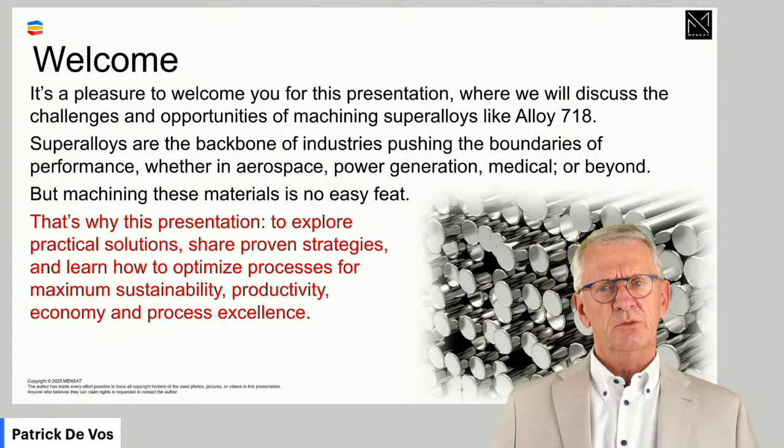That's why we have this presentation, to dive into what exactly is machining of superalloys, where the real challenges are, and more important, how we can cope with them, how we can handle it. My name is Patrick de Vos, I'm your host of today.

I have a model, one could say, of a machining process which I want to share, because this is the framework on which I base a lot of statements I make. I try to define machining as a physical process. Machining is a process where a tool removes material through a process of deformation and shearing off. In such a process, lots of phenomena take place: mechanical, thermal, chemical, whatever. It's a rather complex system.

Machinability is about the ability to bring balance in this system, where I have a cutting tool confronted with a workpiece material, and I want balance. I want the loads acting on the tool and the load bearing capacity of the tool to be in balance. Then I have a balanced machining process, and the variables in this equation are numerous. There are quite a lot of variables we have to take into account if we want to understand this physical process. Creating a good machining process is solving the equation, one could say.

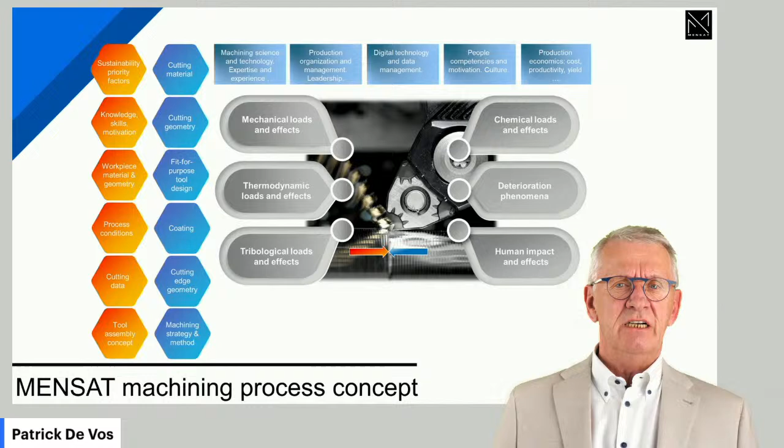To solve this equation, quite a lot of knowledge domains and skill domains are needed. One could say the profession of a machinist is rather difficult. One has to have insights in physical phenomena, understand organizational stuff, and so on and so forth.

Solving the equation also means we have to be able to measure. We need metrics, and the very typical metrics we have in machining are tool wear. Later on when I talk about machining of superalloys, you'll hear me talk quite a lot about wear processes and deterioration. The quality of the finished workpieces is another metric. Don't underestimate still today the opinion of the operator, especially when it's a skilled operator. He can read the process, and listening to what he saw or observed is a very important metric.

In the end, one could say machining is a technological thing, but it's also a commercial thing, because with machining we want to produce workpieces for customers, and in the end it's the customer who decides if we did a good job. A good job in machining can be multiple things: it can relate to costs, productivity, promises made on delivery time, sustainability stuff, and so on and so forth.

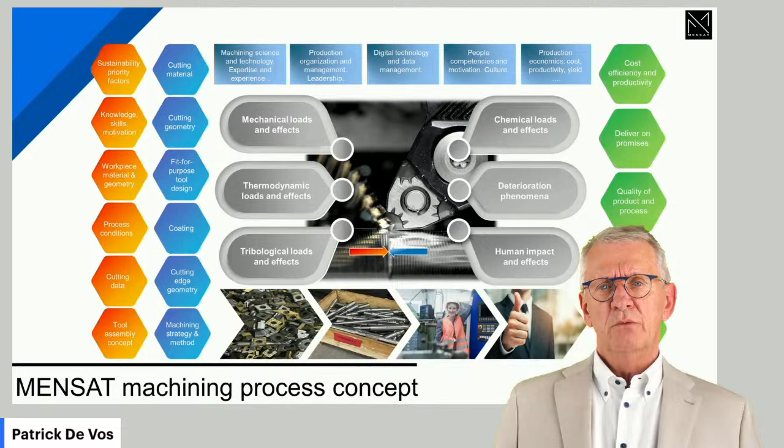So this is the model I use, and in the background this is the model I want to use when we talk about machinability elements of superalloys also. If you want to learn more about this model, there's quite a lot of literature available, and if you're interested, just give us a message and we will inform you more about it.

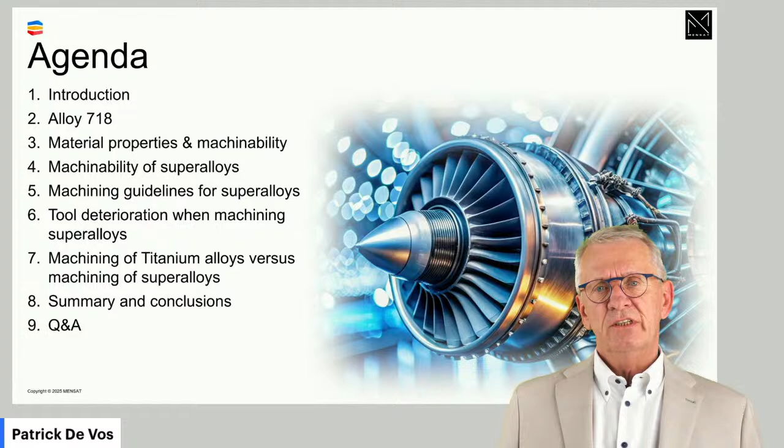There are differences, and I want to draw your attention to those differences, just to make clear that because these are two rather expensive materials, a titanium alloy and a superalloy, if we make false suppositions, if we think, we suppose, it could lead to losing workpieces.

And as I already said, it's a bit of a dangerous exercise. Now, superalloys, the name superalloy, perhaps interesting to know: the word superalloy was used for the first time in a report made in a metallurgy lab at Boeing in 1954.

One of the people there was referring to what was a nickel-based alloy, saying this is a superalloy, as it seems it behaves completely different from other materials we work with. A superalloy keeps its strength at very high temperatures, instead of losing it like we normally see in metals. And that is the origin of the word superalloy.

Superalloys keep their strength at very high temperatures due to the so-called gamma prime precipitation strengthening. I'm going to come back to it because it's a phenomenon we machining people have to be aware of.

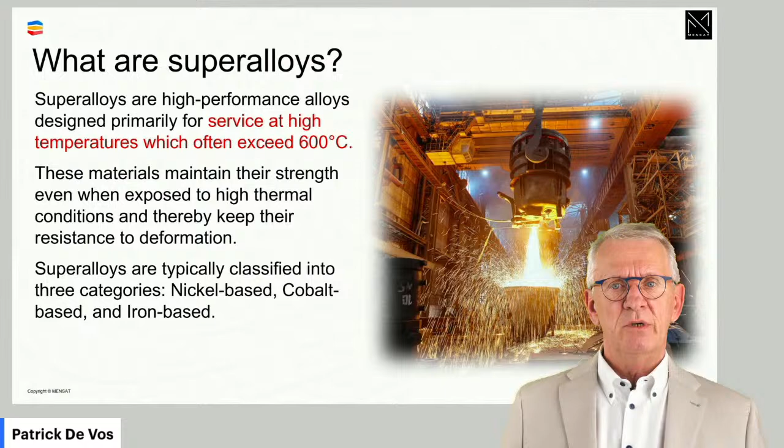We find mainly these materials, as I already said, originating from aerospace. There we very typically find nickel-based materials, Inconel 718 is kind of the type material for aerospace applications.

We also find power generation, where it's more the cobalt-based superalloys we will meet. And there are also applications in the medical segment, where it's the more complex alloys. Cobalt, chromium, molybdenum are typical examples of materials we use there.

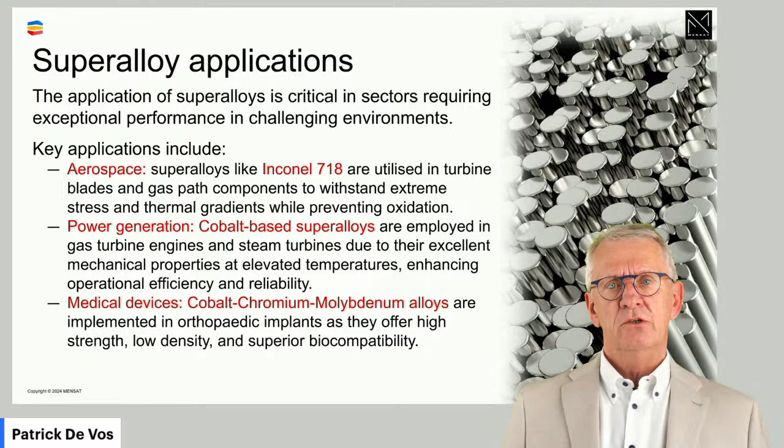Superalloys, as I already said, have quite a lot of members, but we can split them into three groups or subfamilies. You have the nickel-based superalloys, mainly found in aerospace applications. Cobalt-based superalloys, where the main material is cobalt. And then we also have the iron-based superalloys.

The iron-based are kind of the oldest superalloys. I would say iron-based is mainly there where we look for less expensive materials. It's perhaps dangerous what I'm saying now, but from a performance perspective, iron-based are the least ones, but on the other hand, they are also the cheapest ones.

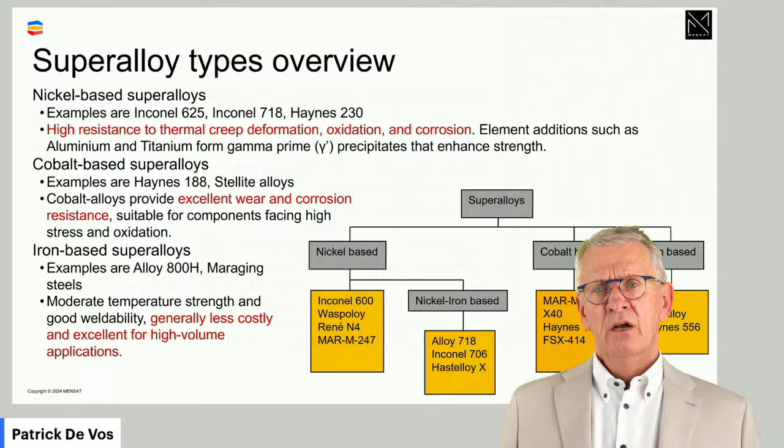But these are the three big families. What we have in superalloys is that quite a lot of the materials we are confronted with are commercially indicated or have commercially indicated names. That means that contrary to steel applications or cast iron, where there are standards and norms, it's a bit of a thing we still miss in superalloys.

But I'm going to come back to it because people working with standards and norms are working on that. Now, the key properties we use superalloys for is the high strength of the materials, and especially high strength, which is kept at high temperatures also.

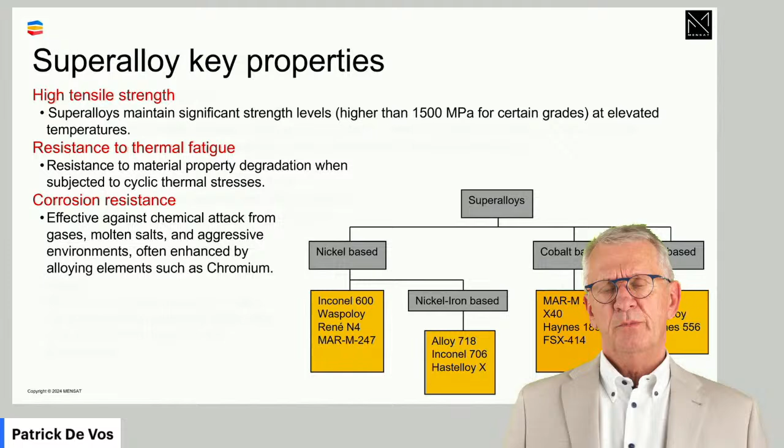Resistance to thermal fatigue: if the materials are exposed to quickly changing temperatures, the materials can handle that. A traditional steel, when you expose it to quickly changing temperatures, will develop temperature cracks in the structure. Superalloys are more resistant to that, and there's also corrosion resistance. Especially certain types of superalloys show rather high corrosion resistance.

Now, superalloys, and I take here the example of a jet engine, you find very often in a construction together with, I call it here, sister materials.

If you look in a jet engine, you find titanium alloys, superalloys, some parts perhaps in steel, some parts in aluminium, some parts in stainless steel. You find all these materials kind of always in the same assembly. And that's why machining people always think it's a group of materials.

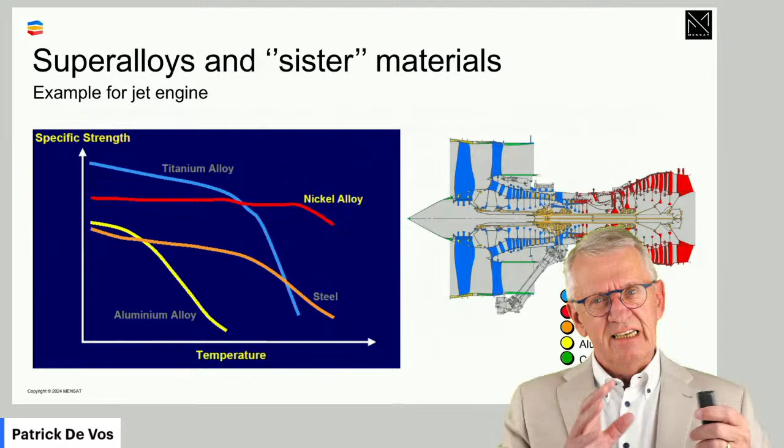Now we have to be careful with that, because if I take titanium alloys and superalloys, and I take two very typical representatives of those materials - titanium 6Al4V, which is commercially perhaps the most used titanium alloy, and I compare it with the superalloy Inconel 718, or alloy 718 - what we see is that from a strength perspective, at lower temperatures, titanium is stronger than a superalloy like Inconel 718.

However, when temperatures go above 400-500 degrees Celsius, titanium starts to lose its strength, while alloy 718 keeps the strength up to close to 1000 degrees Celsius, where titanium by then already lost nearly all of its strength. That's a big difference.

The other big difference between the two materials is the density. Titanium has a low density, whereas superalloy has a high density, even perhaps higher than traditional steel.

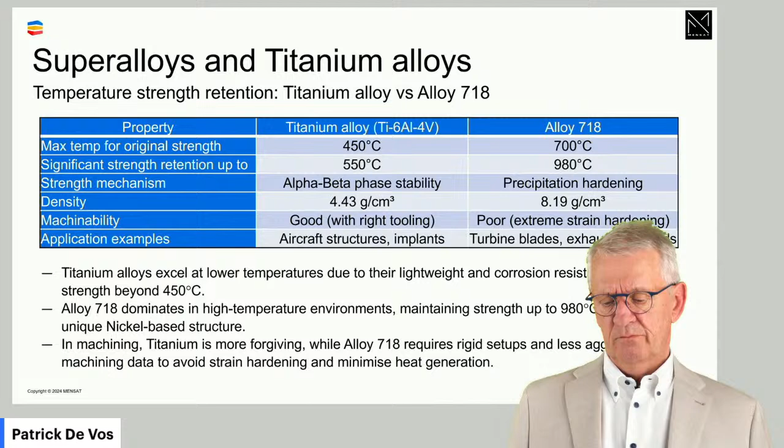The machinability, here as a general picture, but later on we go much more in detail. I would say if you compare the two, machinability of a superalloy is lower than the machinability of titanium. But I'll specify that more in detail later on.

Now, alloy 718 - I already used the word a couple of times. One of the original superalloys, and still today quite a lot used, is the so-called Inconel 718. Inconel 718 is a commercial name of a material which basically contains around 53% nickel, with a lot of properties related to that.

Now, a group of people sat together and they said, we always compare superalloys with steel materials and try to define machinability of superalloys compared to machinability of steel alloys. But that is a bit of a handicapped comparison, because we try to compare two different types of materials, and that doesn't always work well.

So we kind of need a standard when we talk about superalloys. We need a reference material, and that material became what is referred to today as alloy 718. If a material is allowed to be labeled alloy 718, and the origin of it is Inconel 718,

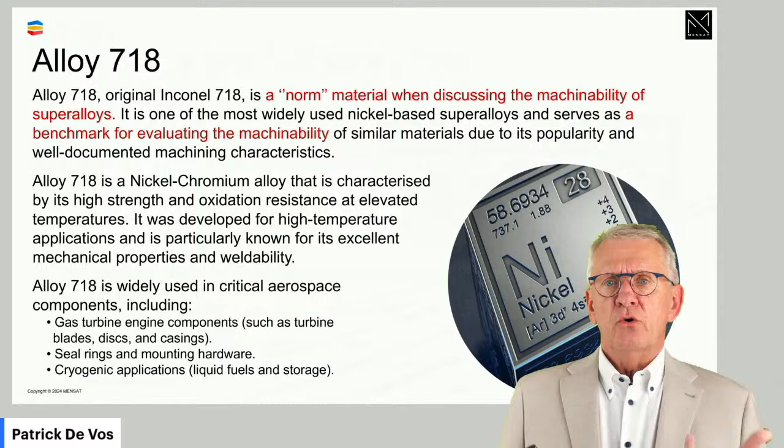it has a number of standardized norms, properties, features about composition, about properties, and also, from our perspective as machining people, machinability elements. Alloy 718 shortly is the reference material we use more and more when we talk about machinability of superalloys.

Now, just so you have an idea, what is alloy 718? It's a rather hard material, and depending on how it is produced and thermal treatments and so on, it's between 30 and 45 Hardness Rockwell C. It's a rather tough material at the same time. That's one of those things that makes superalloys super - they can be hard and tough at the same time.

There is serious strain hardening in this material when you deform it, which is a wanted property from a constructive perspective, where we use superalloys as construction materials. For us machining people, however, this is something to worry about.

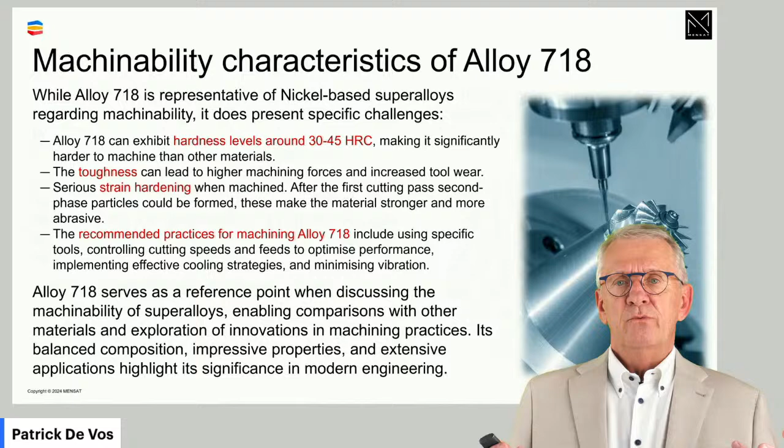Very often, if we talk about superalloys, we will take the machining practices for Inconel 718, or alloy 718, as a reference, and compare - we call that, a bit the wrong word, but anyway - the standard approach. Compared to that, we classify other superalloys in terms of how to select cutting tools, how to select cutting conditions, and so on. In short, alloy 718 is a bit of a reference material when we discuss machinability of that big family of superalloys.

Now, if we talk about material properties and machinability - machinability being a very vaguely defined thing that says to which extent it is easy or more difficult to machine a material - it is as vague as that. I always, for years, have people discussing what is the machinability of a material, and they want to hear percentages. Now, don't talk about percentages, because machinability as such is not defined.

There is no unit to it. It's a very vague thing, and if we want to talk concretely, we have to pick out one specific thing in the machining world - a cutting condition, a type of tool, a productivity rating, or a cost efficiency rating - and take that as reference. But as such, machinability is very vaguely defined, and machinability is what ISO, for 50, 60 years now, tries to capture in the so-called ISO system.

Where we talk about P materials and M materials and so on. What we should not forget is that this system originally was established somewhere in the mid-70s of the previous century.

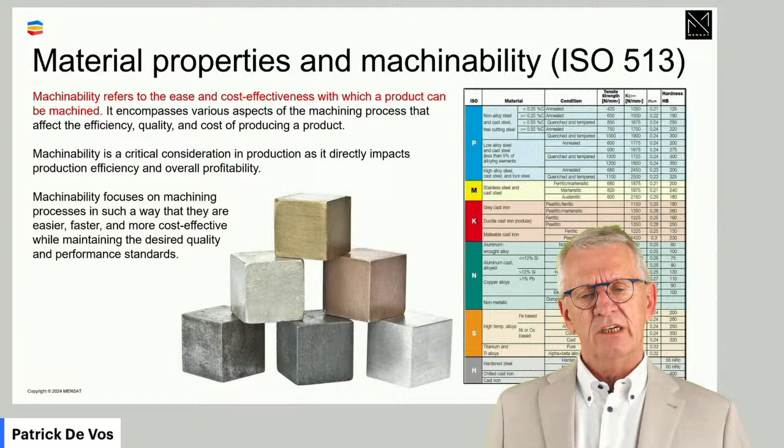In an age where materials were steels and cast irons, and all the other materials we have today were nearly not existing, the original ISO approach was based on mechanical properties only: hardness, toughness, ductility, that type of thing.

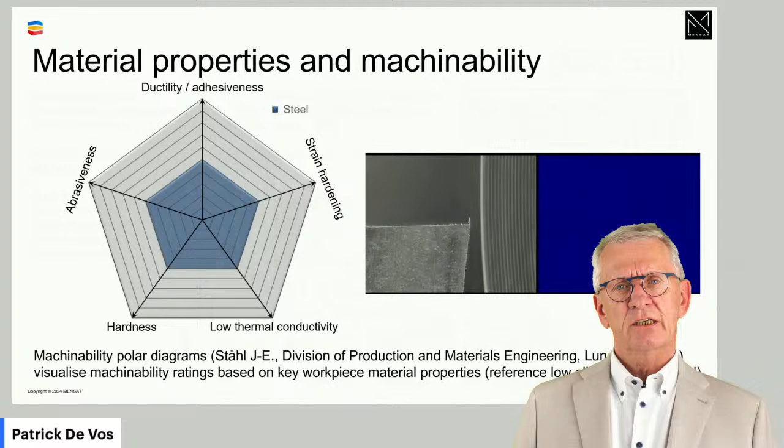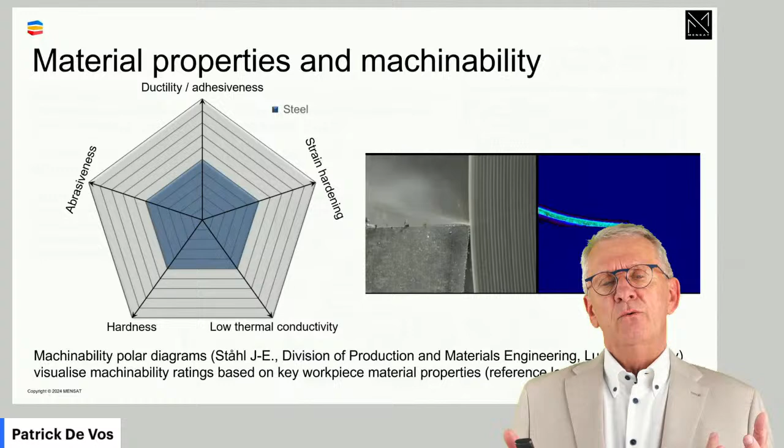And if we look at the materials we're confronted with today, that's just not enough. That's why people have looked for better approaches, and a system I personally like a lot, because from a theoretical perspective it explains quite a lot of phenomena we're confronted with, and from a practical perspective it gives us working handles to figure out machining strategies, tool selections, cutting data, and so on—for materials not only steels and cast irons, but also non-ferrous materials, superalloys, titanium materials, and so on.

This system is based on basically 5 properties. You have hardness, abrasiveness, ductility, and adhesiveness—that's the part similar to the ISO approach.

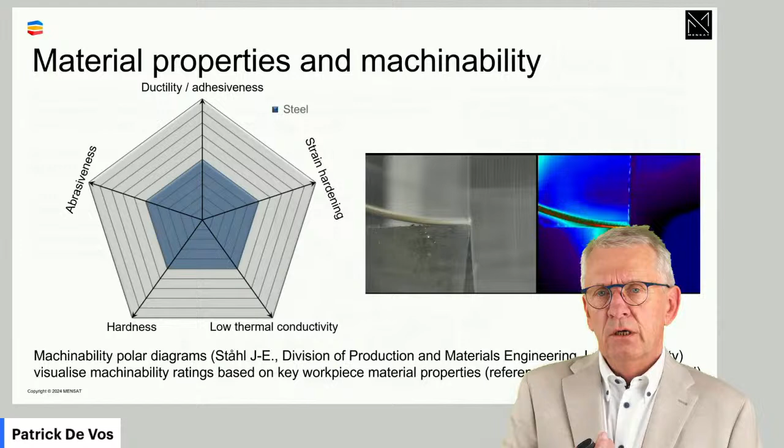But added to that are 2 other variables. One is strain hardening effects—to which extent a material is going to show strain hardening when being deformed. And let's not forget, machining is a deformation process. So if you have serious strain hardening in a material and you machine it, automatically you create strain hardening zones in the material, and that has consequences.

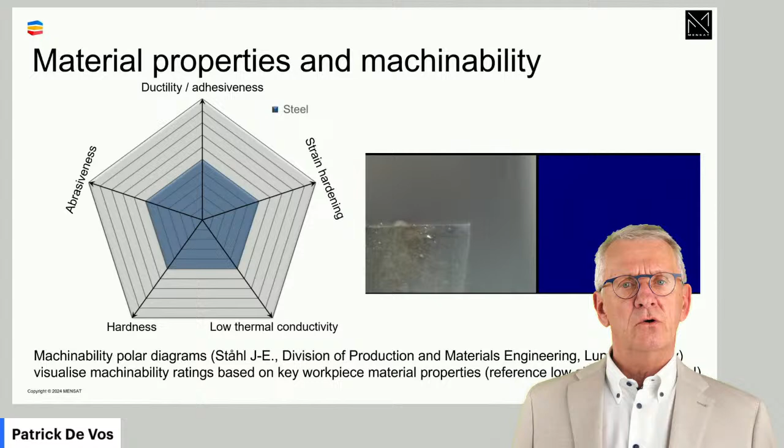The other variable is thermal conductivity. As you deform material, heat is generated, and that heat needs to be evacuated. If it's not well evacuated, that has consequences for the machining process. Think on superalloys, think on titanium alloys—they have low thermal conductivity, they don't take the heat out of the cutting zone and evacuate it through the chips or into the workpiece. That's a property we need to take into account if we want to evaluate machinability in certain materials.

The most beautiful thing in this system is that we can finally jump out of tool wear insights that were more than 100 years old, based on the idea that flank wear and crater wear are what you need on a cutting edge, and all other wear patterns should be avoided. That's correct perhaps for traditional steel materials, but for the materials we're confronted with today—superalloys, titanium alloys—that becomes completely irrelevant.

In those materials you will see other wear patterns become predominant. I don't say it makes us happy, but we will have to accept it. To which extent a certain property is present in a certain workpiece material, we can link to very typical wear patterns—much more accurate than the old flank and crater wear approach. In a number of cases we can accept plastic deformation, and in a number of cases we can accept notch wear. It doesn't make us happy, but we should accept it because it's a reality of the machining life.

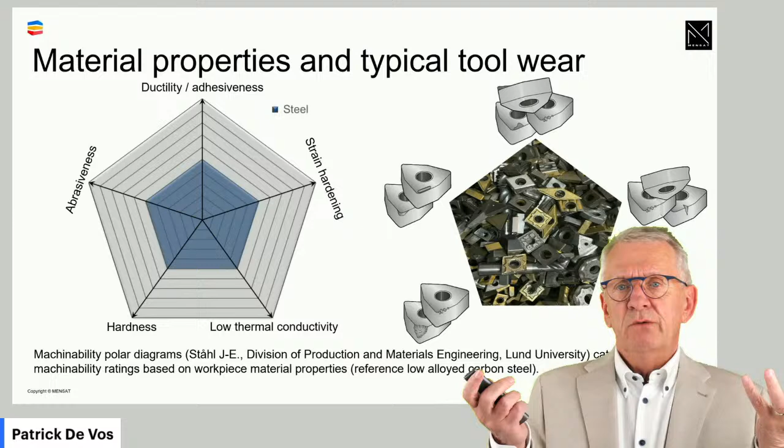Built-up edge perhaps, and again, it doesn't make us happy, but it's a reality. And I'm going to come back to it, because superalloys are put together with titanium alloys in the so-called ISO S group, and that's it.

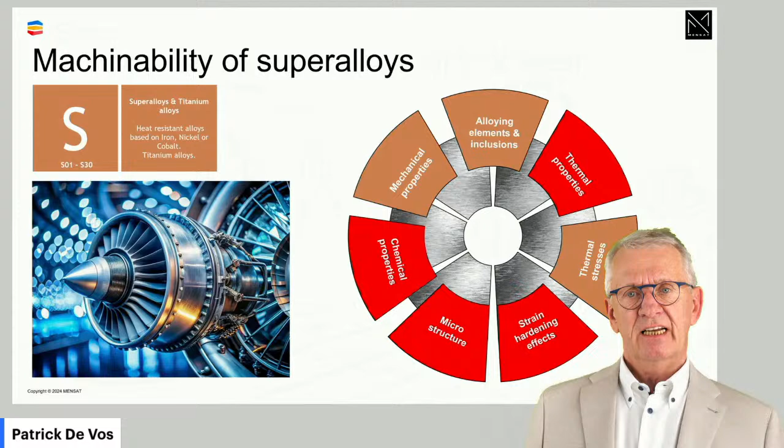I'm not going to spend more time on the ISO system and why it doesn't work fully. Let me jump directly to that system with the 5 axes, the 5 variables—the system developed under the guidance of Professor Ståhl in Sweden.

If you look at these 5 properties, in the picture the blue line somewhere around the center represents traditional steel. Steel, for me, is an average material—more importantly, it's a material we know very well because we've machined it for 150 years. So we kind of know how the material behaves, and we know what's a good cutting tool and good cutting conditions for it.

What we see is that compared to steel, hardness, abrasiveness, ductility, and adhesiveness are all present to a bigger extent in a superalloy than in traditional steel materials. Titanium is less demanding there. But if you look to strain hardening and low thermal conductivity, a low ability to evacuate heat, we see very big differences. Whatever we machine, a superalloy or a titanium alloy, it's strain hardening we will have to cope with much more than when we machine steel, and low thermal conductivity.

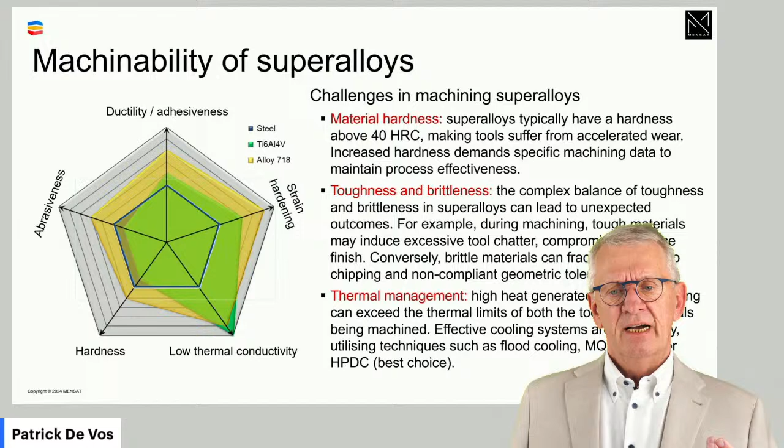But there are differences too. Titanium or a titanium alloy is not the same as a superalloy. There are differences. Also, be very careful, much more than in steel.

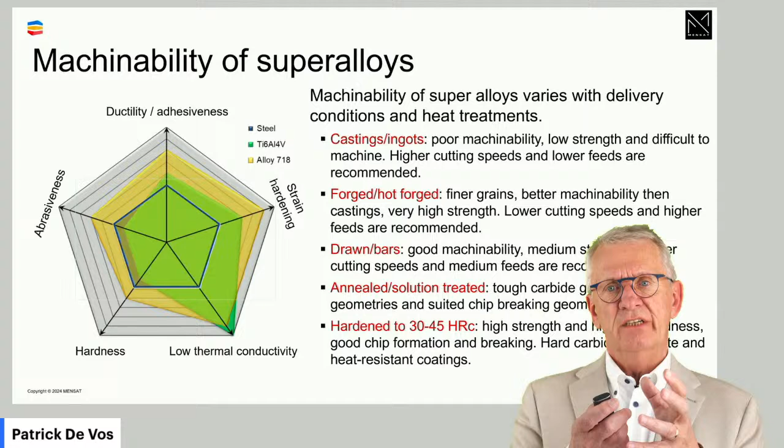If we talk about superalloys, it's not only the material itself, but also the form or shape under which the material is delivered to be machined. Is it a casting? Is it forged or whatever? Those things will in some cases seriously modify machinability. So when we machine superalloys, we need to realize they are different from steel, more demanding toward a cutting tool. They are also different from titanium alloys. Don't put it on one pile. It's two different things. And the form under which the workpiece is presented is also a very important element to know.

Now, if you know your material, if you know to which extent certain properties are present in the material, that helps you a lot to select cutting tools. What you see here is a schematic overview: depending on which properties are present in the workpiece material, these are guidelines we could give you for selecting cutting tools. It's very generic here, not about using this brand or this carbide. It's much more generic, about tougher or harder or more positive or stronger or whatever.

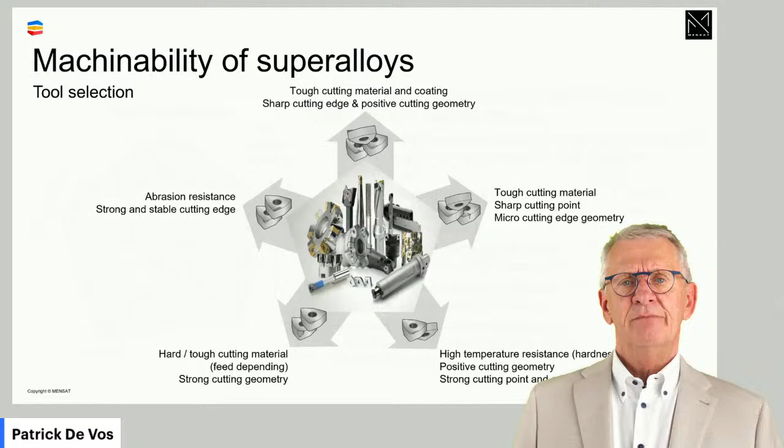Whatever the predominant property is that you want to tackle - let's say it's strain hardening, like we have in superalloys - that means your tool needs to be selected first based on geometry. We need sharp geometries. The carbide grades have to support that sharp geometry. And for cutting conditions, you should use lower cutting speeds, and be a bit careful with higher feeds and depths of cut. You do all of that and start machining, and then you ask: is this the best? Did I do well?

If you see wear patterns, plastic deformation and so on that are typical for that property, that means at least the operation is working according to expectations. It could be that the wear pace is too high, then you need to adapt your choice, increase or reduce certain things, but your basic choice was good. If on the contrary you see a lot of broken cutting edges, that's an indicator, an early warning. You did something wrong solving the equation, because if strain hardening is the issue and you find a lot of broken cutting edges, that combination is not logical.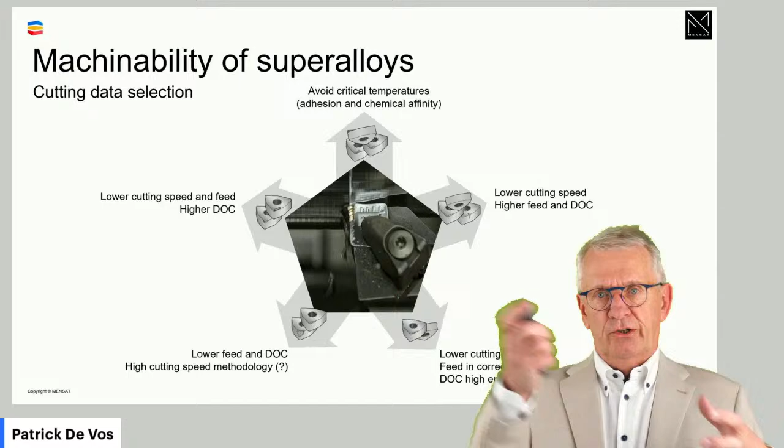A workpiece material has five basic properties - you need an idea about it. You don't always need a number necessarily; it's very often good enough to have an indication: will it be more, will it be less? On that you can base your tool selection, perhaps even your machining strategy selection, cutting conditions. Where is your indicator that you did well or not?

I need to modify. If I translate that now more concretely to superalloys, in this chapter what I want to do is bring together some academic insights, the theoretical part, with practical things, what people observe in a workshop. If I bring that together, it gives me some basic advice to follow.

Some general practices when dealing with these materials. I see a mistake on the slide - it says alloy 781, but it should be 718.

Use sharp tools. That's the primary advice. The cutting should be done with a sharp cutting edge, for a number of reasons. The main one is to minimize heat generation, because superalloys show rather low thermal conductivity. If you generate too much heat, it concentrates in the cutting zone with negative consequences. Also, a positive acting cutting edge creates less deformation before cutting, meaning the strain hardening effect will be less present during the operation.

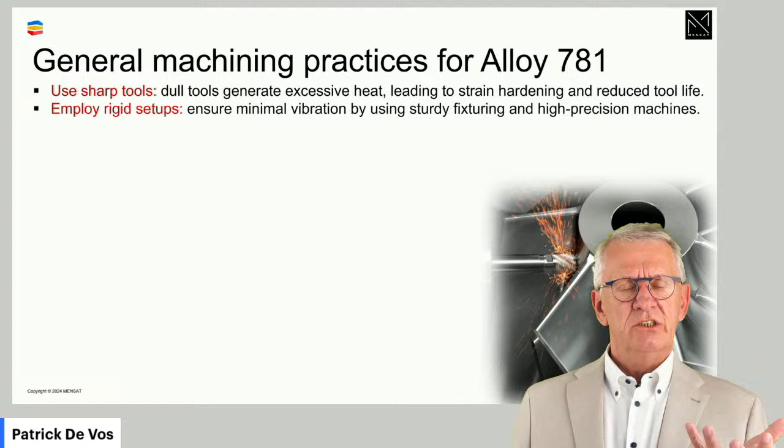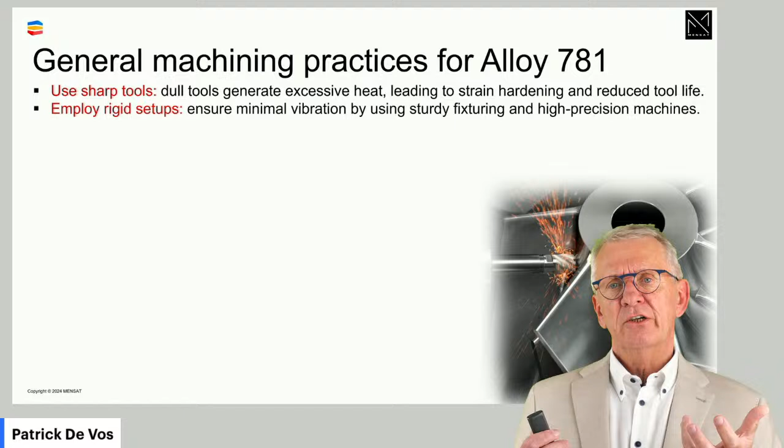Make sure the tool is working in stable conditions with a sharp tool. Avoid micro vibrations - that's the weak part of a sharp cutting edge. It's sensitive to micro vibrations, too high cutting forces, and too big variance in cutting forces. We have to take care of that.

Chip evacuation - because we work with positive geometries, chips will show a tendency to be long. That means we have to manage those chips well and evacuate them properly from the cutting zone.

Heat generation is the thing to worry about. Make sure you do whatever is possible to generate as little heat as possible, and that the heat generated is evacuated in the best way. With some thicker chips, cooling methods are important here.

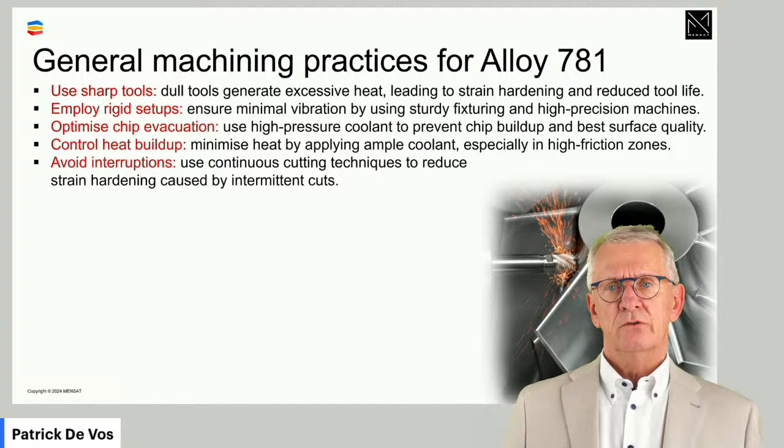Avoid interrupted cuts as much as possible. If you think of a milling application, of course you're confronted with it all the time. But even in milling, through the strategy you select, you can create a situation where the milling becomes less interrupted - I'm thinking of dynamic milling, radial milling, that type of stuff.

Make sure you have the correct cutting conditions - cutting speeds not too high, feeds not too low but not too high, depths of cut should be big but not too big. The window in which you can maneuver with cutting conditions is, compared to traditional steel, rather narrow, and you should bear that in mind.

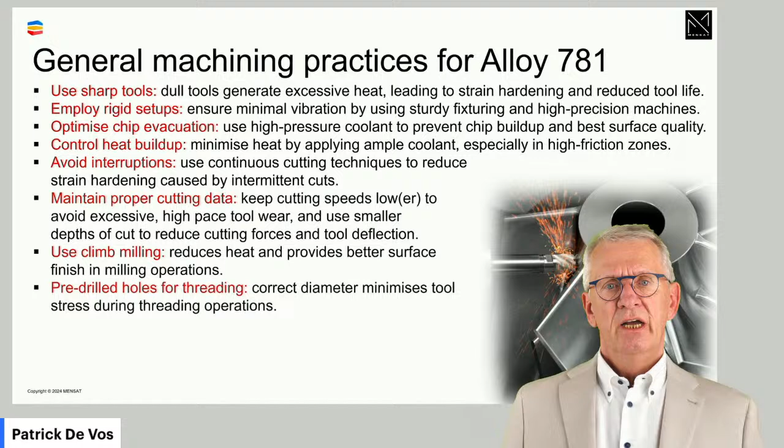Use climb milling, very typical for milling applications. If you have to do threading operations, the pre-drilled hole diameter is important for an internal thread, because these materials have strain hardening effects. The success of a threading operation - whether thread turning, tapping, or milling - in stainless steel or superalloys is very often defined by the pre-drilling operation. Bear that in mind.

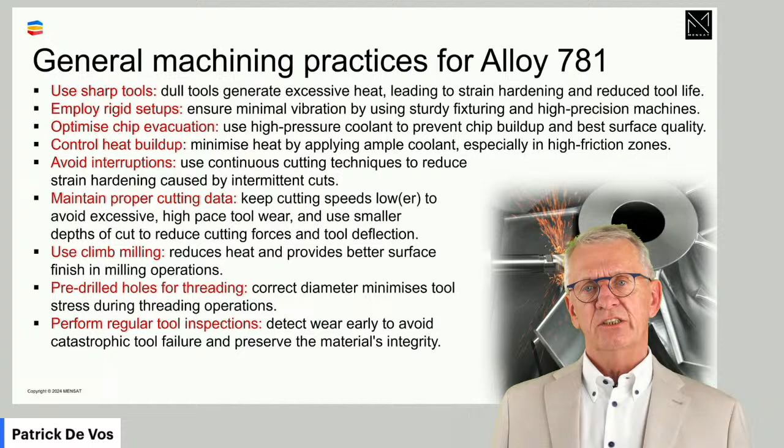Make sure you inspect your tools on a regular basis, because the pace at which wear develops in superalloys is generally higher than when machining traditional steels.

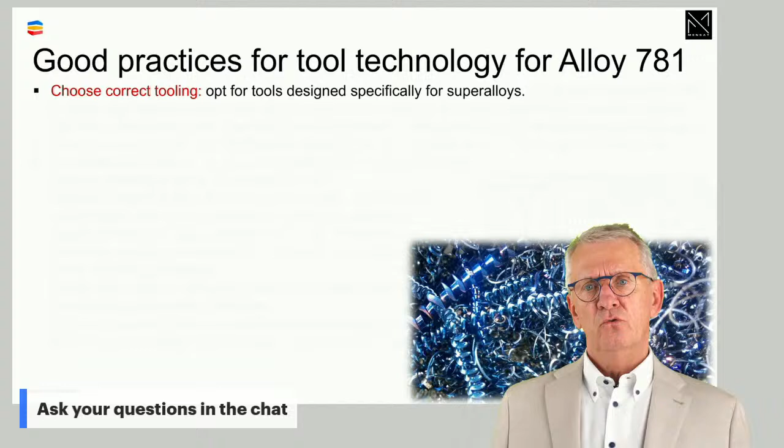Tooling technology - make sure you use correct tooling. In the past we didn't really have tools designed for superalloys. Today we have them, so use them.

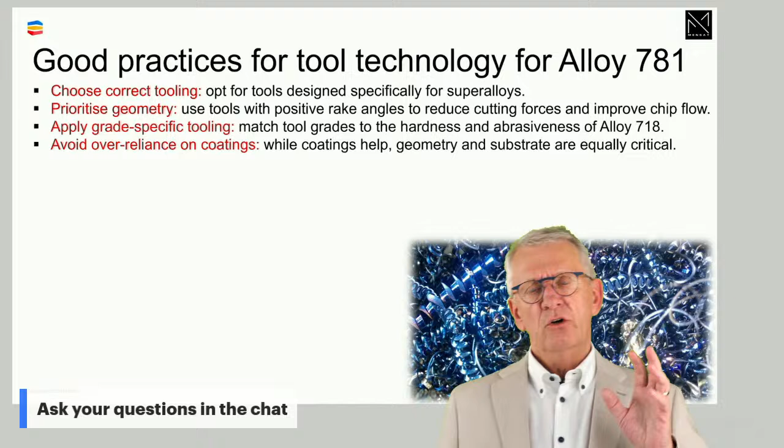Prioritize geometry in your tool selection - geometry first, grade second. The geometry should be sharp, and the grade should support a sharp geometry. A good grade is a micrograin, tough grade, and the coating should be PVD or MTCVD type, which covers the sharp cutting edge well. But don't overestimate the importance of a coating - if your geometry is wrong for a superalloy, or your substrate material is not good, the coating will not make up for that.

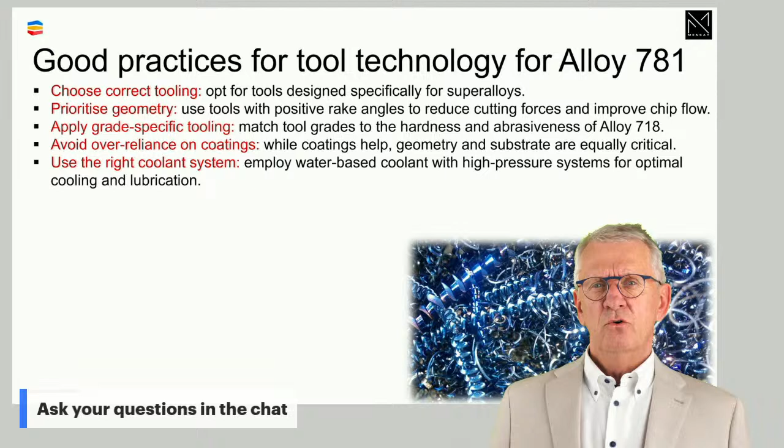Cooling systems are important here, so make sure you spend enough attention on them. Cutting speeds in general are rather low. Feeds should not be too low, but on the other hand high enough without being too high. Feed selection in a superalloy sometimes requires a bit of trial. Keep your eyes on tool wear - I'll come back to it.

Limit engagement time, especially in situations where you're not really cutting but rubbing material - so too small feeds, too small depths of cut. Threading again is a very dangerous operation here.

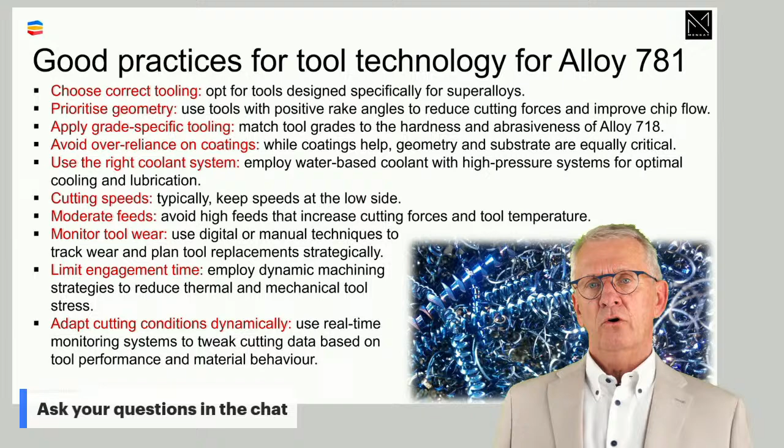Where possible, modify your cutting conditions in a dynamic way, depending on where you are during the operation. A milling cutter in a corner should be used with different cutting conditions than a milling cutter along a wall.

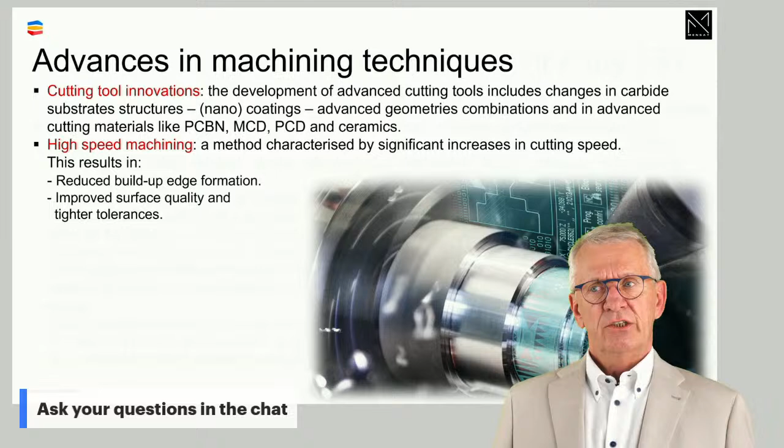What we see towards the future talking about these materials is that we see more and more specifically developed tools for superalloy applications. Keep your eyes on that. Superalloy machining is an application where people still have their eyes on cutting speeds, because by definition they are low, and every improvement in cutting speeds would lead to higher productivity and better surface finishes.

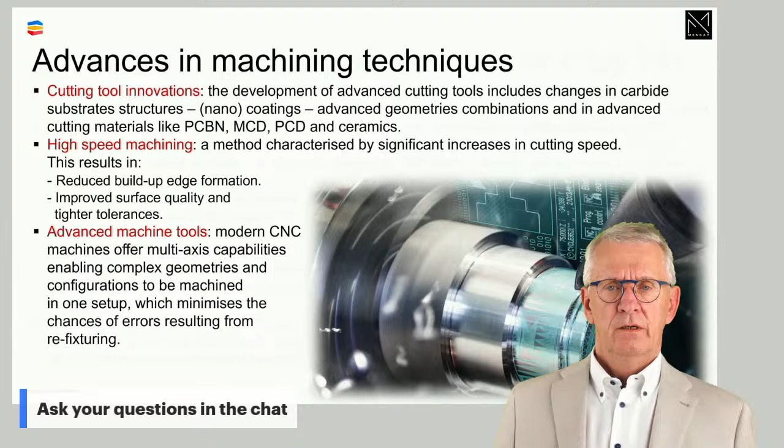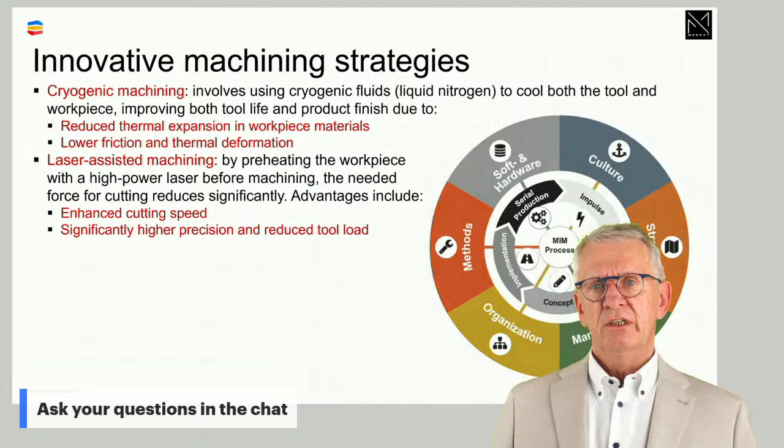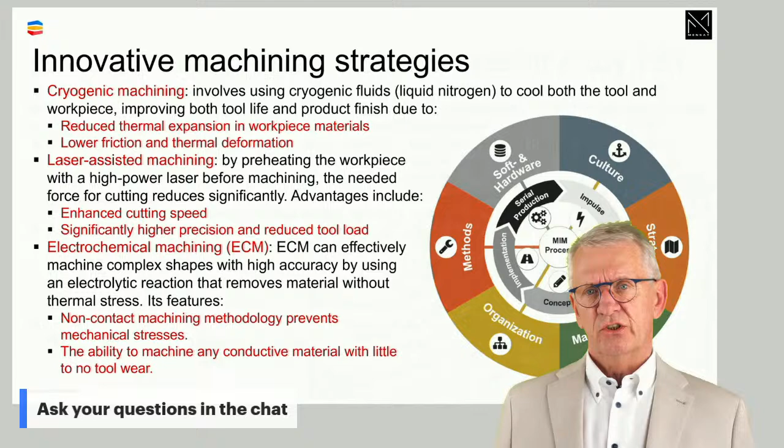Cryogenic machining seems to have high potential for superalloy machining. Of course, it demands specific installations, safety things, and so on. Laser assisted machining: lots of universities are doing experiments combining typical machining with laser preheating. And then there is electrochemical machining as an alternative, because with electrochemical machining you do not create machining stresses in the surface, and that, from a quality perspective of a finished workpiece, can be advantageous.

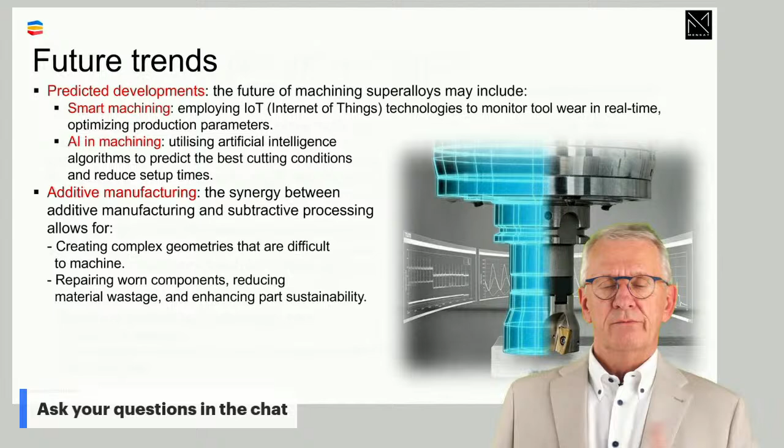Predicted developments, of course, smart machining, Internet of Things, because as I already said, if possible, modify cutting conditions during the operation where appropriate, but that's easier said than done. Internet of Things can help us with that. Artificial intelligence algorithms could help us in achieving that objective. And then there is, of course, the interaction between additive manufacturing and subtractive machining, where some parts can move from one to the other, and where a combination of the two could lead to big improvements.

Now, tool deterioration: when you machine superalloys, basically you find all the wear patterns we know. But the two that normally are the primary ones are notch wear and plastic deformation. Notch wear is due to the strain hardened surfaces of workpieces, and plastic deformation is due to the lower thermal conductivity in these materials, which means more heat stays in the cutting zone and can overheat the cutting edge. But also the other wear patterns will appear.

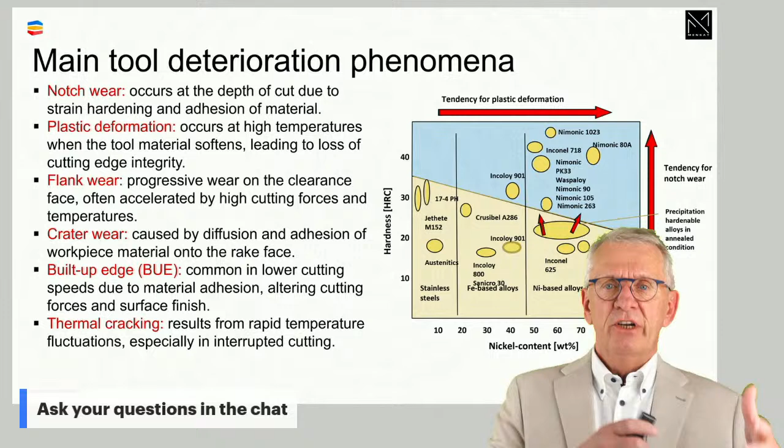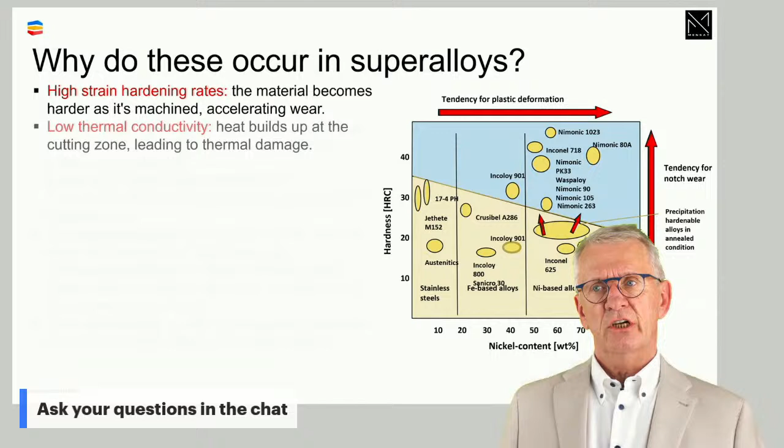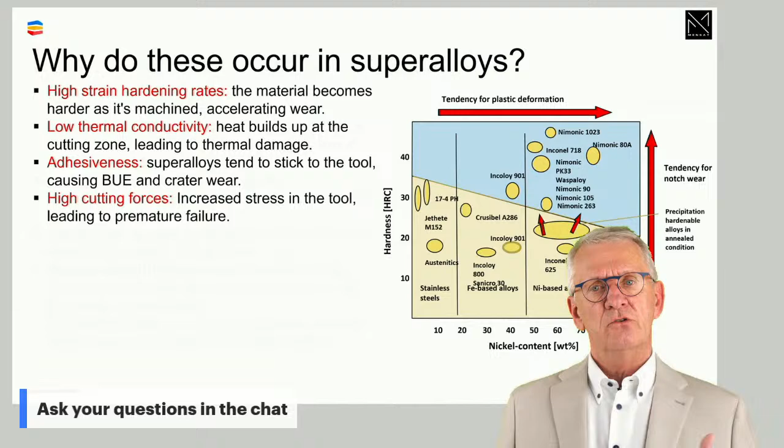And again, be careful here because I use the term superalloys broadly, but that's what the diagram tries to show you: how different types of superalloys lead to more or less predominance of certain wear patterns. This is the traditional thing: the strain hardening gives you the notch wear, the low thermal conductivity gives you the plastic deformation. But you also have adhesiveness leading to built-up edges and related issues, and rather high cutting forces that could lead to cracks, chipping, or perhaps breakage.

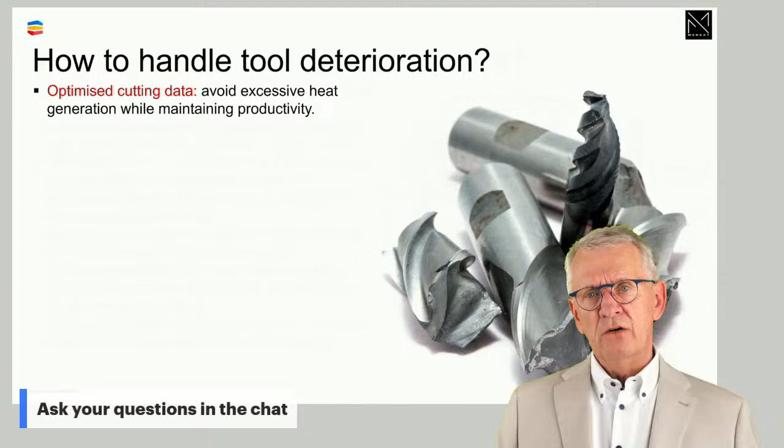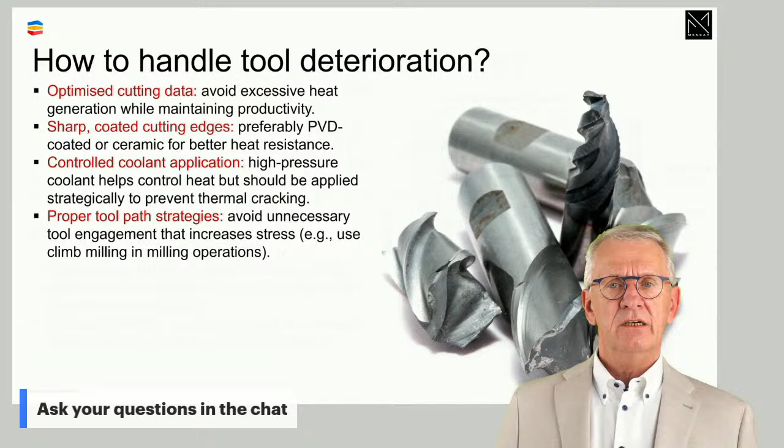How do we act here? What is important to counteract if something goes out of control? Cutting conditions should be in line with what they should be for the properties present in the workpiece materials, and also in line with the type of tool we normally use, sharp cutting edges, coated cutting edges. Cooling plays an important role here: to which extent is the cooling going to interact actively with the process? Toolpath strategies, milling strategies, are important too: to which extent am I going to expose a cutting edge during the operation to really unfavorable conditions or not.

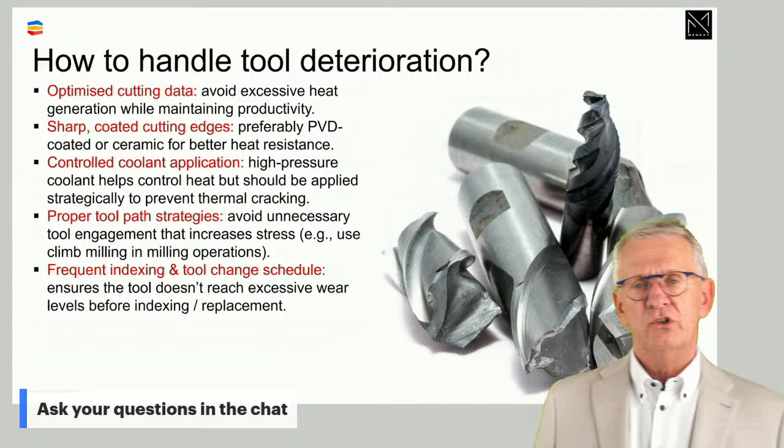And as I said, even if you are fully under control, you will see that the pace with which tool wear patterns develop is higher than what we are used to with steel applications. So keep your eyes on the cutting edge. This is important because the previous things are reactions—if you see, you do. I think to have higher predictability in the process, to avoid destroyed workpieces, which is rather expensive since the material itself is expensive, you should stay ahead of the wear. You should know what is going to happen and what to keep your eyes on.

So predictability is important, and that's why the machinability system with the five properties is so interesting. Heat generation and heat evacuation are important here—give them the necessary attention from the beginning. Make sure the process is as stable as possible: the machine tool has stability, the cutting tool has stability, and the two together have the highest possible stability. If not present, be aware of the consequences.

Plan your tool changes strategically. Don't wait till it's too late. If we talk about superalloys and tool deterioration, it's not about having a tool life which is as long as possible, which we are all used to doing, but it's more about making sure you have full predictability, you are fully under control of the process, so you don't lose workpieces, because that's very expensive.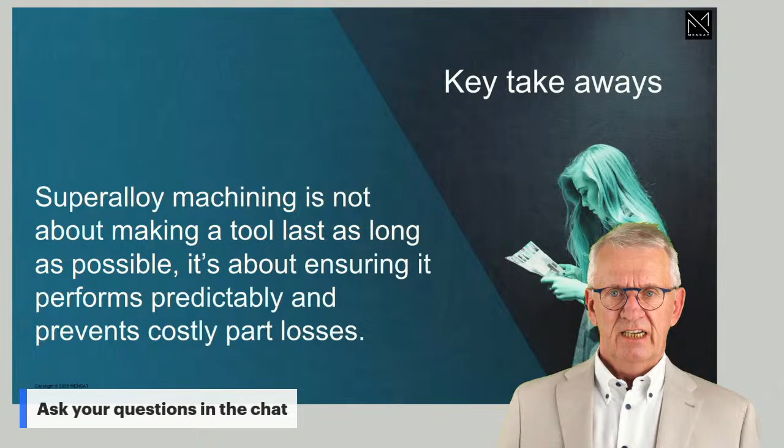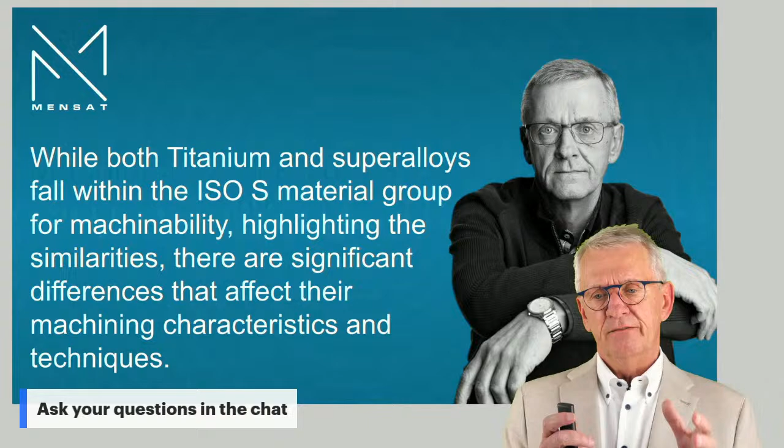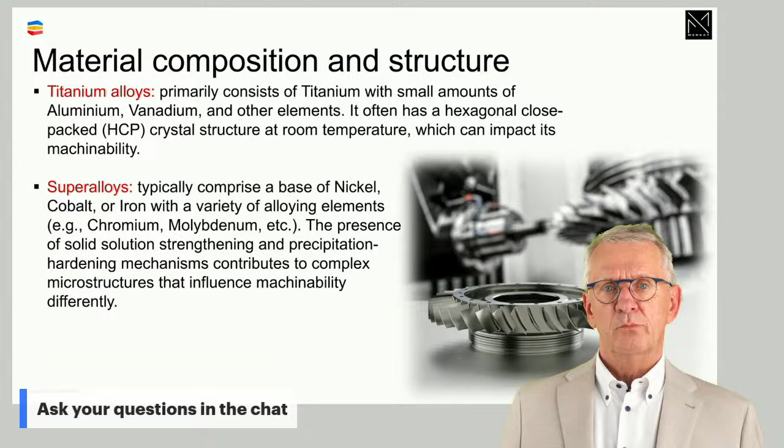The last part: titanium alloys versus superalloys. I know in the ISO system they are in the same group, the ISO S system. However, they are different, and titanium alloys—at a previous occasion we have already talked about titanium alloys, so if you want to learn more, you should review one of the previous sessions we had. Titanium alloys are mainly titanium, superalloys are mainly nickel or cobalt or both. That is what we are confronted with.

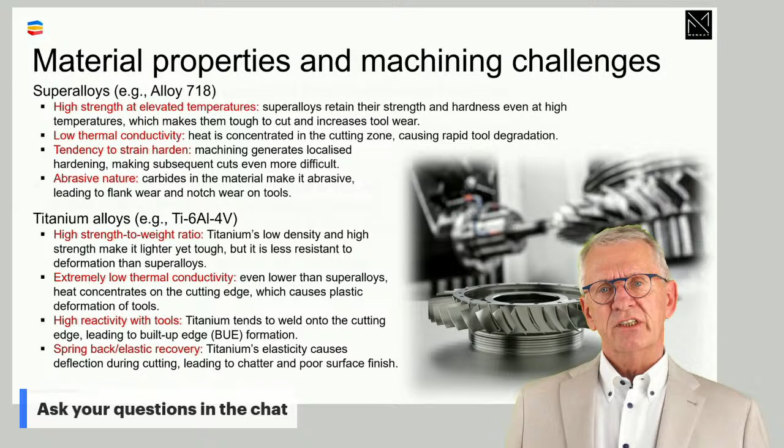Superalloys: we give you the properties and the consequences of those. If you look to titanium alloys, superalloys have high strength at elevated temperatures. Titanium is also called high strength, but it's a different high strength - it's a high strength to weight ratio. And when the temperatures stay below 400, 450 degrees Celsius, titanium kind of has a higher strength than a superalloy. But when the working temperature where the workpiece is going to be used is higher, then it's a different story.

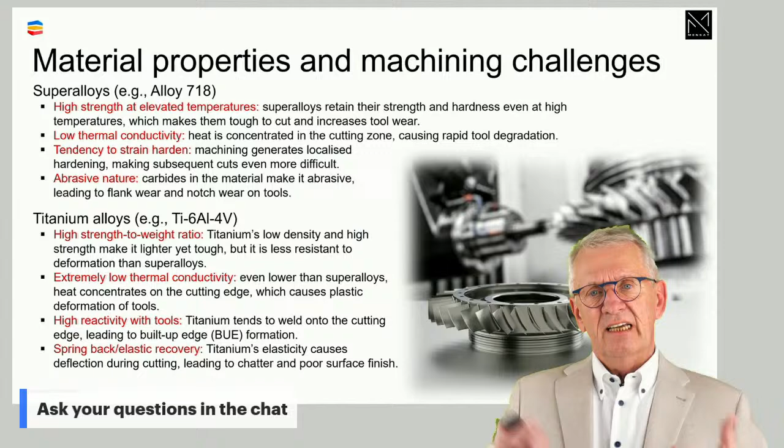Superalloys have low thermal conductivity. Titanium has an even lower thermal conductivity. So all the things about heat control, heat generation, heat evacuation, it's important in superalloys, but it's even more important in titanium alloys. Superalloys have a high tendency for strain hardening, titanium alloys not so much. That's important. However, titanium alloys show a tendency to chemically react with cutting materials, so here we see differences. Superalloys are abrasive - the strain-hardened spots, the precipitation-hardened spots are creating abrasive effects, where we don't find that so much in titanium alloy, but titanium alloys have an elastic recovery type of thing. They bend easily, and we have to be aware of that.

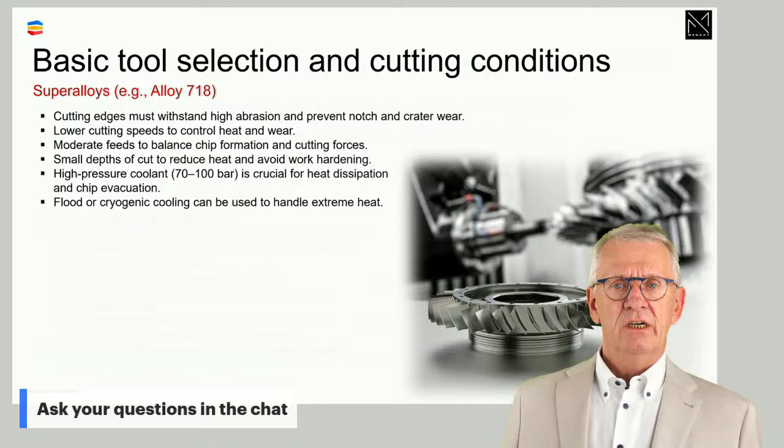When we talk about tool selection, for superalloys we listed the things about tool selection. Titanium is different. Cutting edges in superalloys have to have abrasion resistance, notch wear resistance, crater wear resistance - that is important. Where in titanium, it's more about the chemical reaction stuff, the built-up edge thing and so on that we have to be aware of.

Superalloys and titanium alloys bear in common low cutting speeds. Titanium alloys use even lower cutting speeds due to the lower thermal conductivity. For feeds, superalloys use moderate feeds, not too small, not too high. In titanium, normally we can use higher feeds - it's not going to give mechanical problems when we use very high feeds. In superalloys, you have to be more careful with that.

Depths of cut in titanium - take them as big as possible without deforming the workpiece and that type of stuff. In superalloys, you have to be a bit more careful again, because if you go for bigger depths of cut, you are going to generate more heat, which is part of the game then, and you have to handle that.

Superalloys, high pressure cooling systems are interesting. Titanium, it's more about lubrication. That is what we have to be careful about.

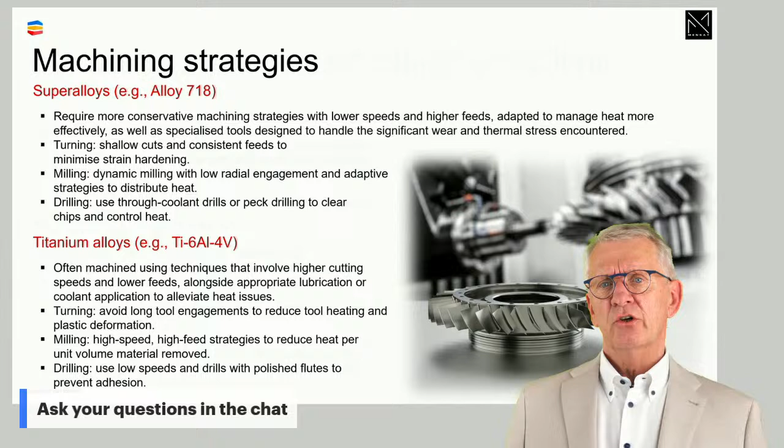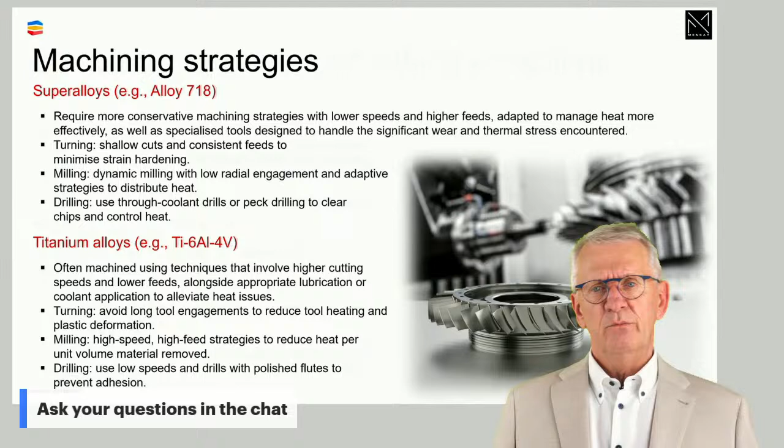Superalloys, I would say it's the more conservative machining strategies with the lower speeds that we go for, while in titanium alloys it's there we can use, or we are closer to the more typical high-speed machining systems. It's not the high speed like we know in steel and so on, but it goes that direction. So for superalloy machinability, machining strategy stuff, I would say it's very vague now, but I would say go for high feed approaches, where titanium alloys, high speed, high feed methods are a better approach.

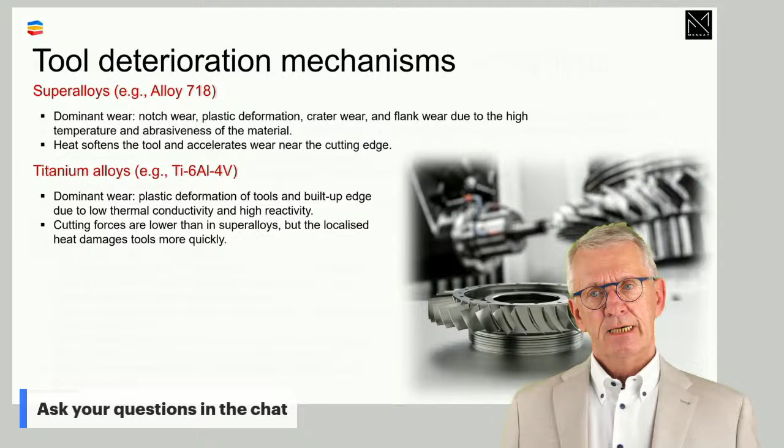Tool deterioration - cutting edges when being used in titanium or in superalloys look different. Dominant wear in superalloys is notch wear and plastic deformation, but you will see all the other wear patterns also appearing, where in titanium alloys you see more plastic deformation and built-up edge wear in general. That is what we notice there.

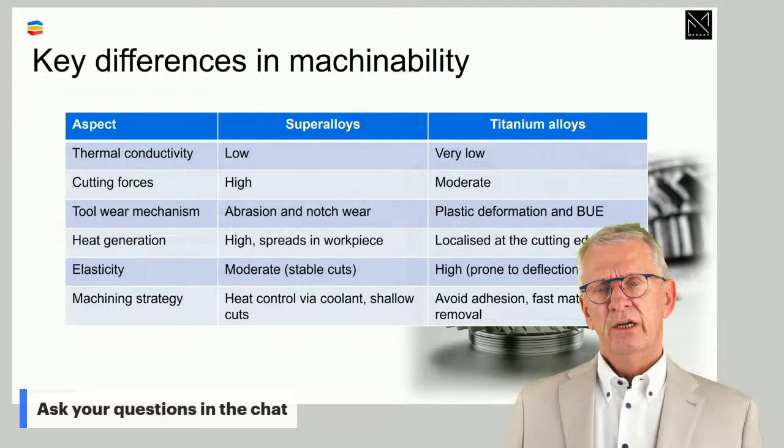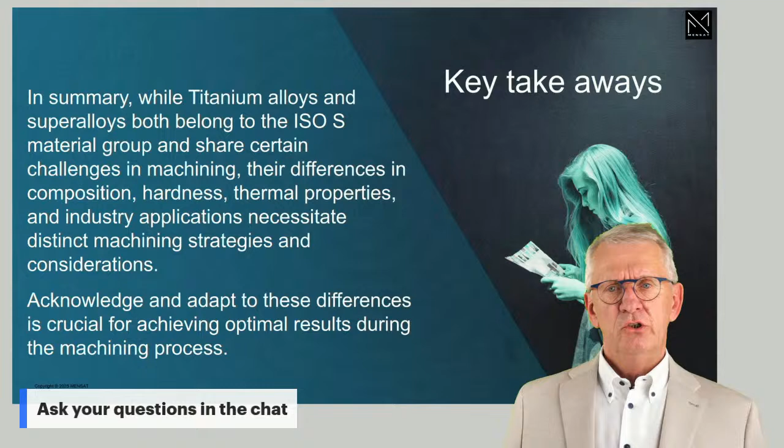If I try to put it in a table: superalloys - and between brackets again, it's alloy 718 - and titanium alloys, you see here the differences. Thermal conductivity, cutting forces is important. Heat generation is important, and those kind of things steer how we do machining, how we select tools, and how we select cutting conditions. Both in ISO S, yet when it comes to a machining strategy, a tool selection, cutting data selection, there are differences we have to be aware of. Don't just copy paste between the materials. That's basically the message I want to bring you.

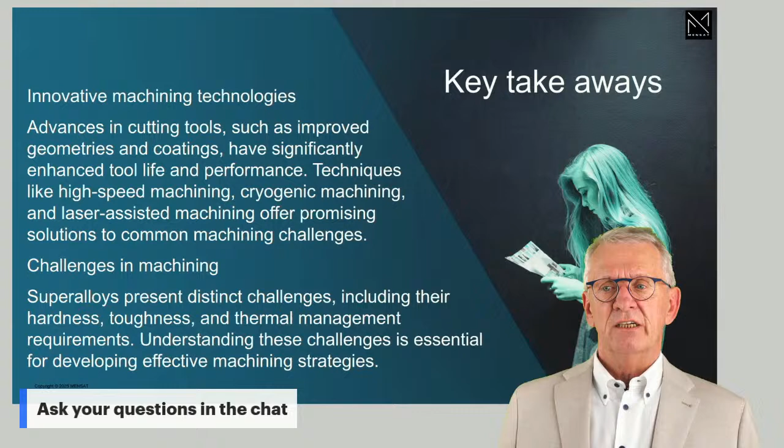It's both materials where cost efficiency, productivity, delivery time, production time are still challenging. If I compare with the more traditional materials, it's more expensive to machine those materials. Productivity is lower, production times are longer, predictability and controllability are lower. So innovation is very important to overcome these challenges. And if this is for you the daily thing, that type of materials, you should keep your eyes on developments of tools, of machine tools, of insights on whatever. The challenges when you machine these materials are different from tradition - and with tradition I mean steel machining, cast iron machining. Understanding the differences is key for understanding how to machine these materials.

Future trends and strategies - I think that especially the digital side of it should have our interest, because predictability is important, because the workpieces are expensive. But predictability we can only have if we fully can follow what is taking place during the process. And to be able to do that and to react accordingly to what we observe, we need those digital tools which are developed more and more.

As a last thing important, I know typical machining people, they do not like theory. They say theory doesn't work anyway. And on the other hand, people in the academic world don't always fully understand the practical reality in a workshop. Especially in this type of materials, where metallurgical developments are ongoing, I think instead of neglecting each other, people should work more closely together to fully understand the interactions between workpiece material properties and how we do the machining of these materials, the strategies we use, the tools we use, how we determine cutting conditions, and so on.

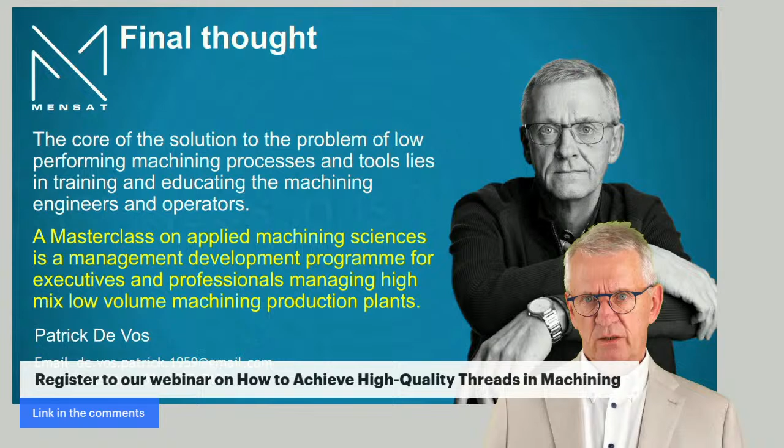One element we haven't been talking about yet, and it's perhaps the most important one - I referred to it once - the expertise of the operator. Still today, more so in superalloys and titanium alloys than in other materials, you have to count on the operator, on his skills, on his or her expertise to observe, to recognize what is observed, and to know what to do - if what is observed is acceptable or not, and if not, what to do. Insight into the physical process is important. If you would ask me what is the first thing to do to improve machining of superalloy workpieces, I would say check on the knowledge and skills of your people, and if you think it can be improved, do so - send them to training, education, whatever.